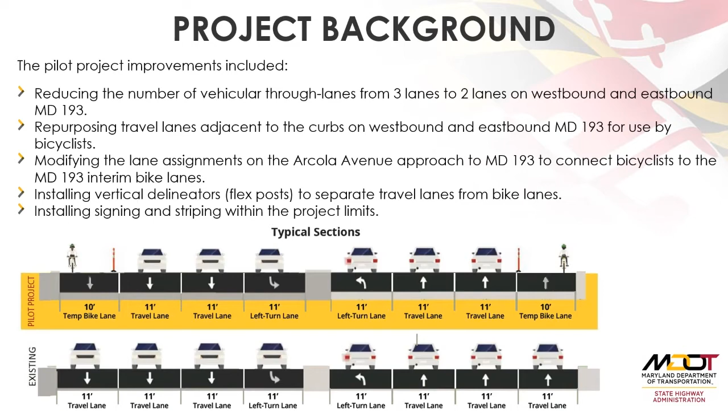Now I'd like to go over some of the changes that took place after initial installation and implementation. Throughout the life of the project, we were continuously conducting field observations to assess performance and find opportunities for improvement. We also received and assessed feedback from motorists, bicyclists, and pedestrians. The following slides aim to show the reasoning behind the design updates and also to show our responsiveness to the associated concerns.

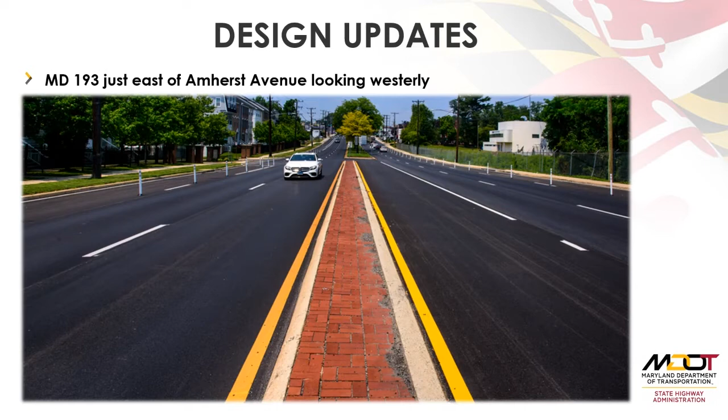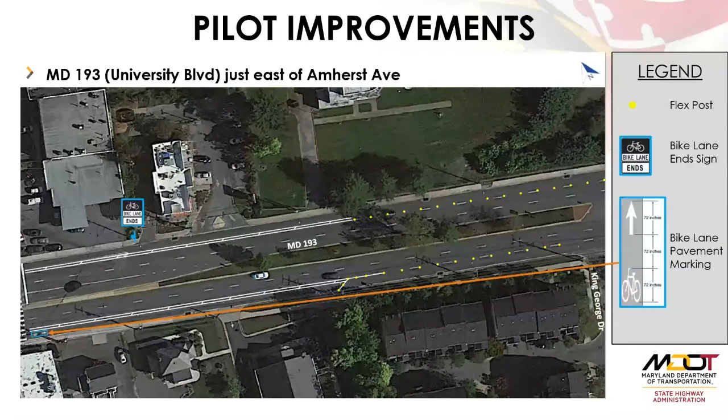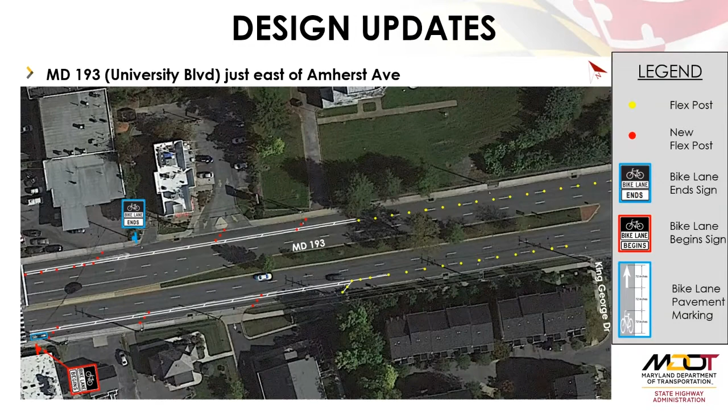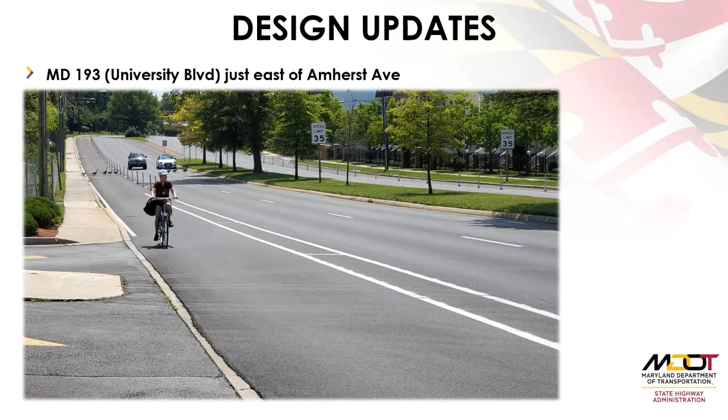In this photograph, you'll see a bicyclist enjoying this section during the earlier months of the pilot project. And just for a moment of levity, you may also notice some geese jaywalking. Some of the practical benefits of the pilot project were reducing the crossing distance for pedestrians, while also lowering the prevailing speed along the corridor.

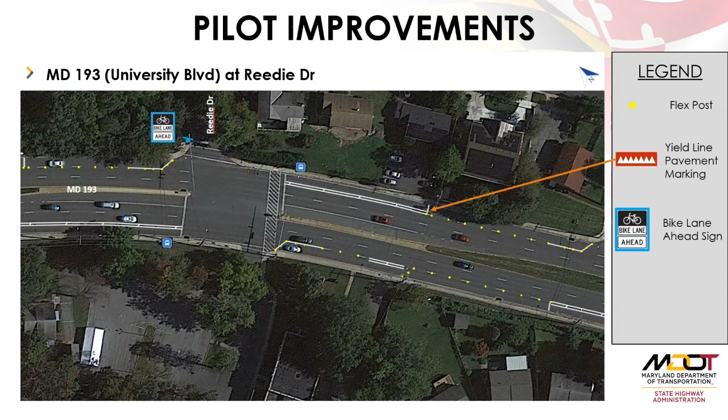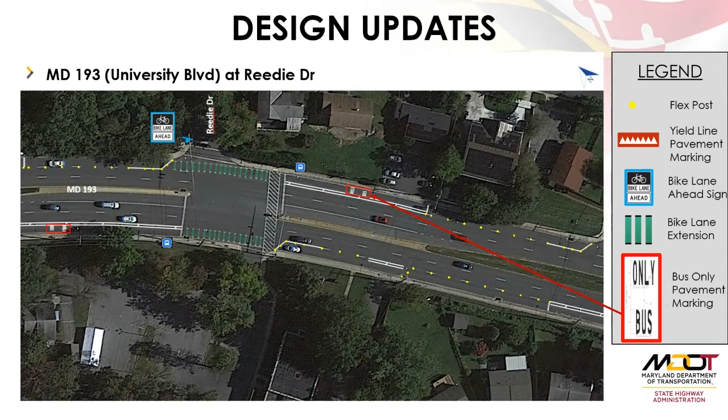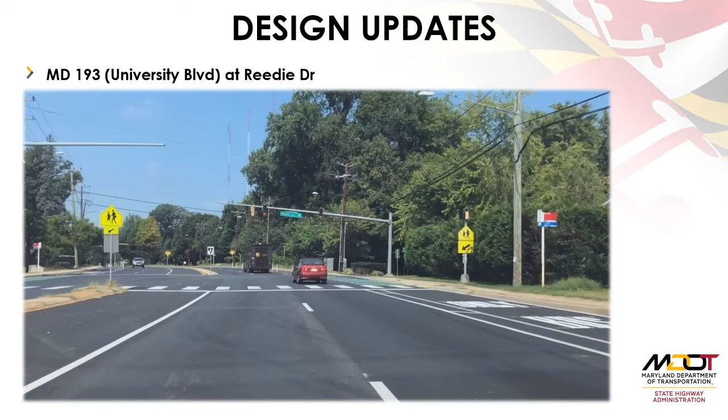In this photograph, you'll see the bus access operating as intended along eastbound Maryland 193 at Reedie Drive.

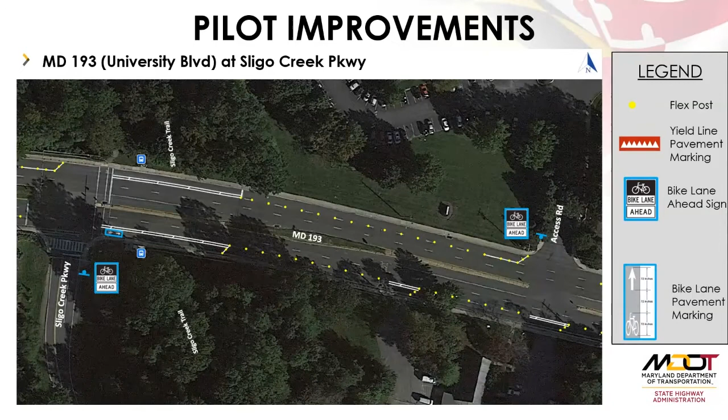Here you'll see the intersection of the temporary bike lane at Sligo Creek Parkway. You'll notice two bus stops as well as a signalized intersection. We also have the Sligo Creek Trail crossing here. I should note that access to Sligo Creek Parkway was, and still is, closed to vehicular traffic from Friday morning to Sunday evening. This worked hand in hand with our Shared Streets pilot project by offering expanded multimodal amenities in and around the Wheaton area.

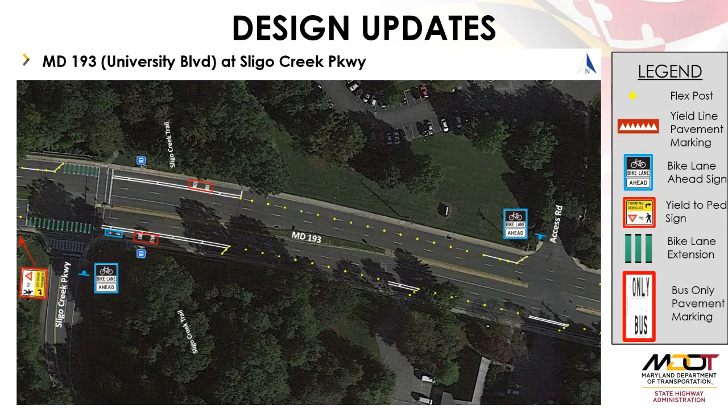Again, you'll see the addition of bus-only pavement markings. As previously mentioned, the addition of green bicycle lane extension lines was also applied at all signalized intersections in the corridor, including Sligo Creek Parkway. You'll also notice the addition of a turning traffic yield to pedestrians regulatory sign. This was to address an incident between an eastbound Maryland 193 right-turning motorist and an eastbound bicyclist proceeding through the intersection.

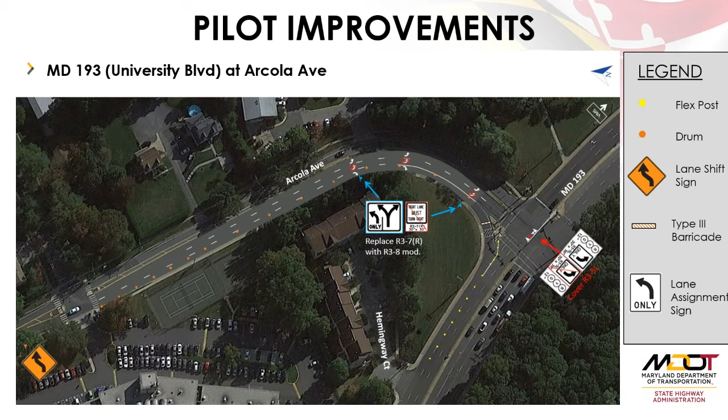You'll find in the legend that in lieu of the type 3 barricade, we are showing a composite barrier, along with a shared left-right lane assignment sign. Immediately after initial implementation, local cyclists asked that we revise the barricade to allow for bicyclist passage. We found it reasonable to accommodate this request by staggering three composite barricades. This improvement does not, and did not, alter the motorist restriction. In lieu of covering or bagging the affected overhead lane sign, our great partners at the Montgomery County Department of Transportation, or MCDOT, offered to replace it with a modified option lane sign.

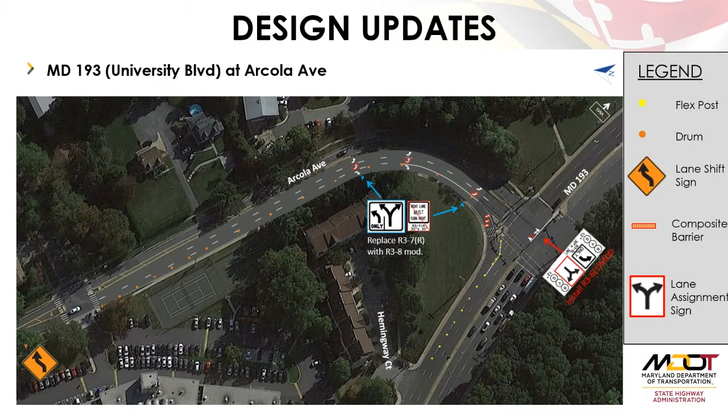In this photograph, you'll see a group or family of bicyclists enjoying this section of the temporary bike lane along westbound Maryland 193, starting from Arcola Avenue. You may also notice the staggered barricades previously mentioned.

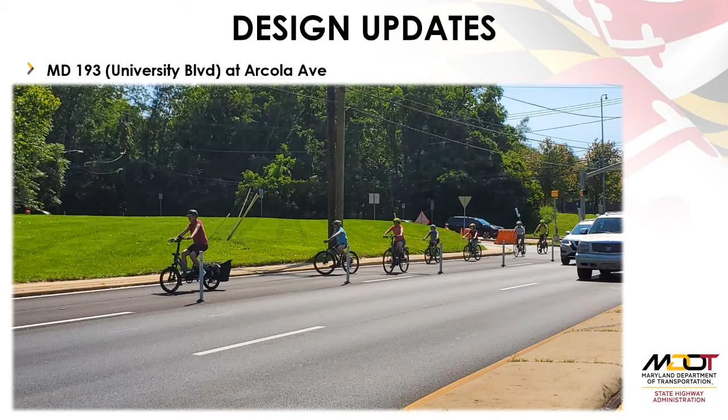It's very important that we take a moment to thank our MDOT SHA District 3 Maintenance Office. Our maintenance shops were responsible for installing, maintaining, and removing all of the traffic control devices described tonight. I can't thank them enough for working day and night through weekends to get this project installed so quickly and efficiently.

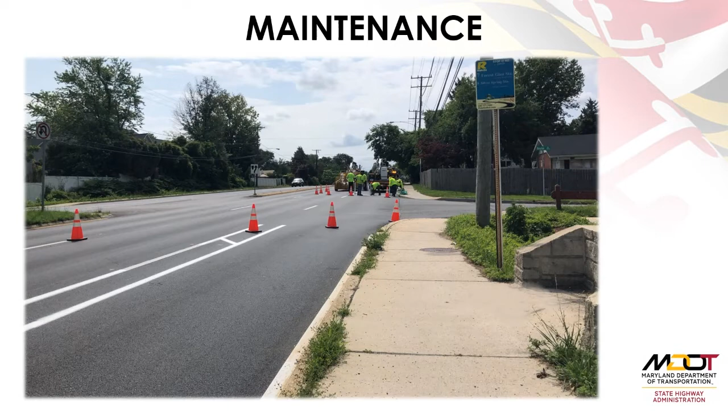During the pilot project, we did experience some storm events that left quite a bit of foliage and debris in the curb lane. We mobilized our maintenance shops to assist in clearing the roadway of these impediments. As an example of the hard work that goes into the maintenance shop's role, please appreciate that this work was done largely by hand and shovel. Once again, I want to say thank you to our MDOT SHA District 3 Maintenance Office and crews.

Let's now get into data collection and methodology. Before we get into the heart of the matter, I want to set the stage for each data set. As you can see, we have 4 sets to review. First, safety. We'll review total safety data associated with the subject section of Maryland 193, followed by a breakdown of injury data and multimodal or non-motorist data.

Secondly, we have speed. We will review speed data collected along the subject section of Maryland 193, broken down by the eastbound and westbound directions. Then we will review traffic delay, which will indicate any motorist mobility impacts through the corridor. Lastly, we have eco-counter multimodal data. Similar to safety and speed, we will further break this down into both directions and modes, reviewing bicyclist data and then multimodal data. To be clear, multimodal means all non-motorists — in this case, everyone on the sidewalk and the pilot bike lane.

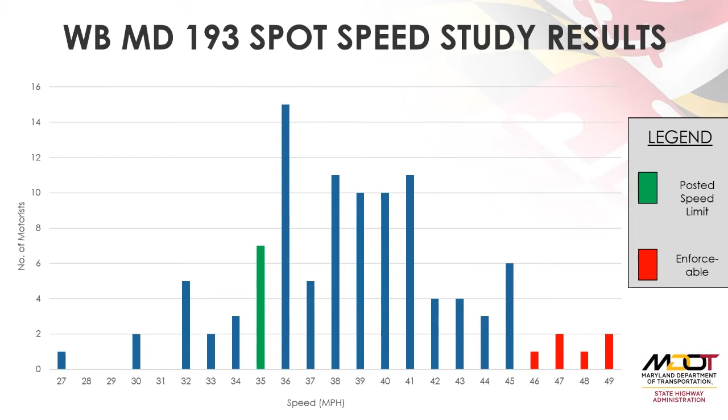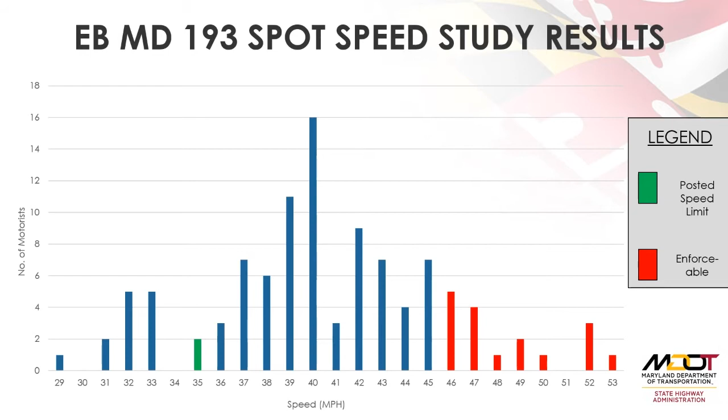As stated during the kickoff meeting last year, signals were optimized throughout the corridor to improve mobility and accommodate bicycle clearance times. All red clearances were modified on June 13th, 2021.

Offset changes at Inwood Avenue were also found to be necessary due to lower travel speeds and slightly longer platoons on Maryland 193. Operations along the Arcola Avenue approach were significantly improved after a defective signal detection camera was found and replaced 2 days later on June 15th.

Operations along the Arcola Avenue approach were significantly improved after a defective signal detection camera was found and replaced 2 days later on June 15th. I'd like to take this time to thank our partners at MCDOT for executing all of these improvements.

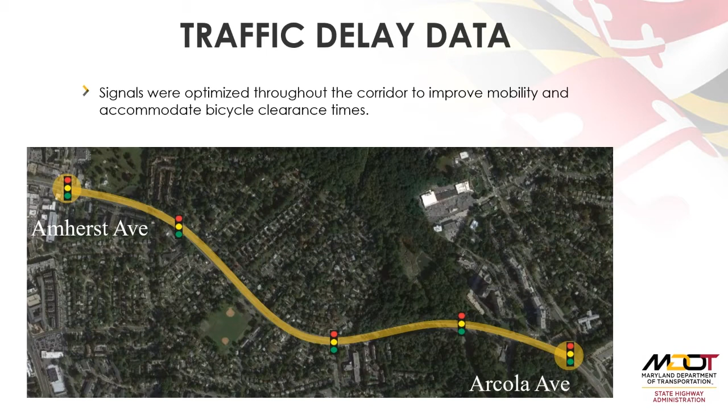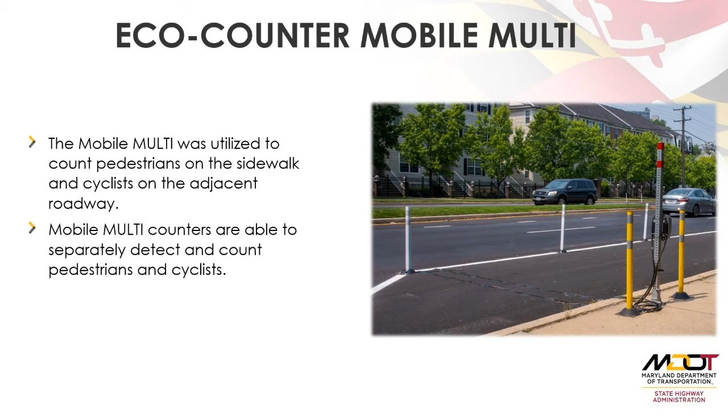The EcoCounter's pyroelectric sensor detects pedestrians along the sidewalk and gives reliable trends. These sensors utilize passive infrared pyroelectric technology. The EcoCounter's tube sensors, with their proprietary algorithm, detect cyclists with over 97% accuracy. These pneumatic tubes utilize piezoelectric technology.

This device does have limitations. If and when the EcoCounter gets struck or jostled, it needs to be readjusted and calibrated. The EcoCounter also does not distinguish pedestrians from any other mode along the sidewalk, meaning bicyclists that may have operated along the sidewalk before or during the pilot project would be included in sidewalk data. And lastly, the pneumatic tube needed additional calibration to eliminate all motorist data.

During the project, it was reported that motorists observed bicyclists abusing the EcoCounter by looping or circling around the device to overcount. In order to avoid any anomalies or aberrations, we will rely on trends as opposed to peaks. And to simplify things further, we ultimately intend to look at an average of eastbound and westbound Maryland 193 trends to understand the overall characteristics of the roadway and the performance of the pilot project as a whole.

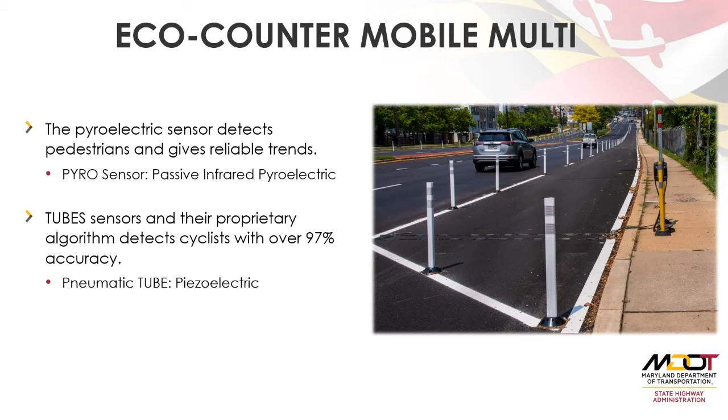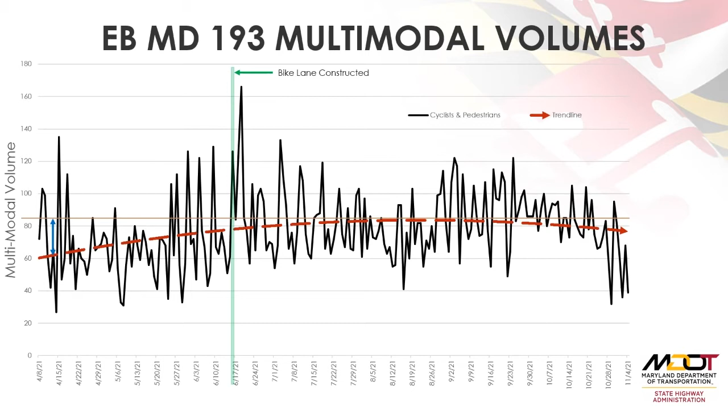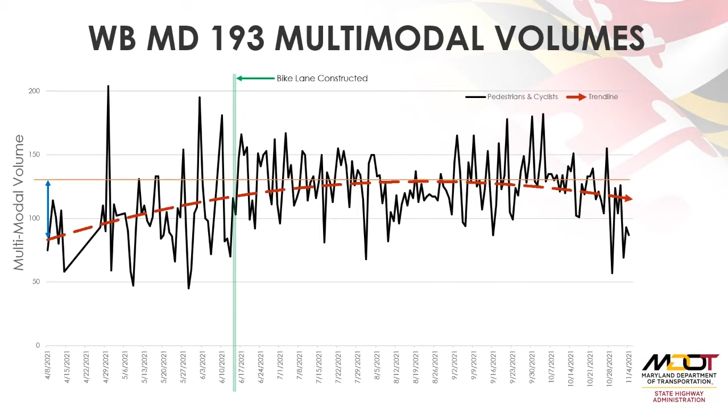Let us now begin reviewing MDOT SHA's Shared Streets Pilot Project survey. Our survey was conducted on the project portal page for 2 weeks, from December 3rd to 17th, 2021. A total of 807 individuals participated in the formal survey. A series of 10 questions were asked.

1. I live within how many miles of the pilot bike lane project? 2. Have you ever used the pilot bike lane project, the pilot bike lane on Maryland 193 University Boulevard in Wheaton? 3. Why have you chosen to not use the pilot bike lane? 4. How often have you used the pilot bike lane? 5. How would you rate your experience? 6. How do you typically travel on Maryland 193 between Amherst Avenue and Arcola Avenue in Wheaton?

7. Being a local traveler or non-local commuter, how would you rate your experience traveling near the pilot bike lane? 8. Why did you rate your experience as submitted above? 9. Why have you chosen to not use the pilot bike lane on Maryland 193? And 10, do you have any other feedback you want to share about the pilot bike lane project? I'd like to go over the survey results as clearly as possible with some simple pie charts.

I live within how many miles of the pilot bike lane project? Among the 807 participants, we found that 60.9% live within a mile of the pilot project. 34.8% live between 1 and 5 miles away, and 4.3% live 5 or more miles away. 12 participants did not answer. It's safe to say that the vast majority, or 95.7% of the respondents, live within 5 miles of the project.